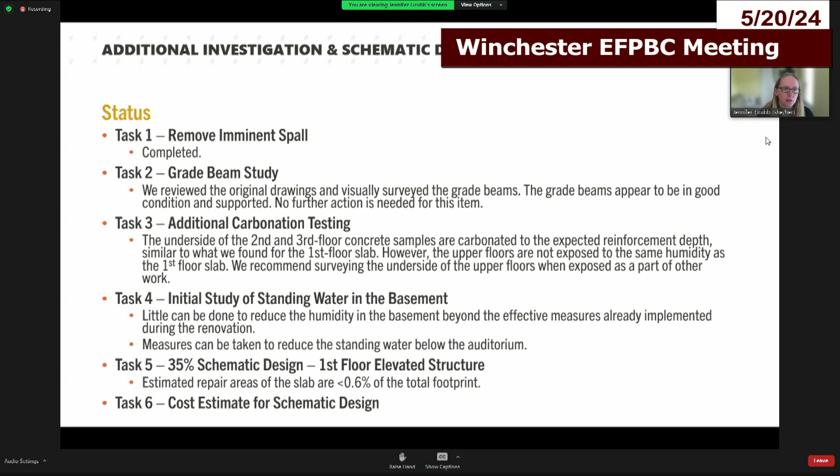Tasks 5 and 6 were coming up with a schematic design and an associated cost estimate. We estimate the cost to be a little over $1 million to implement both the concrete repairs and to apply a corrosion inhibitor to the underside of the first floor slab.

The concrete repairs are a little under 400,000, we estimate, and we estimate 630,000 for the corrosion inhibitor. The corrosion inhibitor, as you see, is the larger piece, and that's what we want to talk about because there are alternate options.

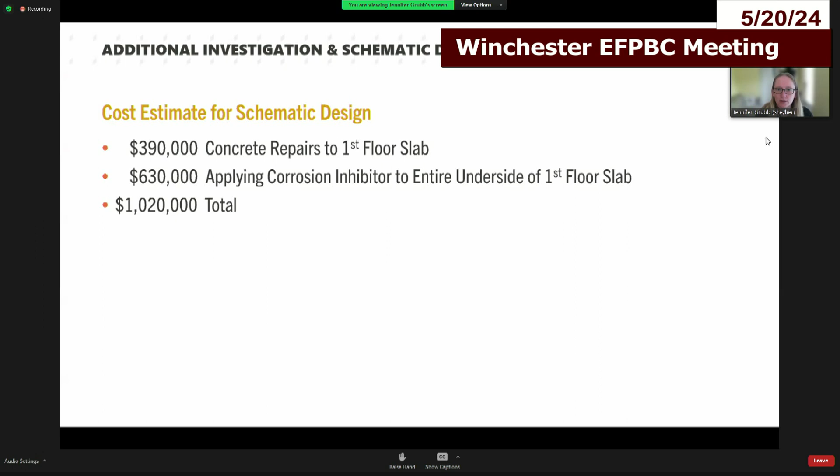Now, we are looking at the underside of the first floor slab because we saw widespread carbonation. Carbonation is when carbon dioxide reacts with the concrete, resulting in a heightened risk of corrosion of reinforcement. So there's a possibility that while it is in overall good condition now, corrosion of the reinforcement could be ongoing, and there could be widespread deterioration in the future.

We don't know the rate or the extent of the corrosion, but we could learn more over time and with further investigation.

I apologize, there was another point I wanted to make. When we talk about the risk of widespread deterioration, you want to know the likelihood of it occurring and what the repercussions are if it does occur. If this widespread deterioration does occur, it'll be costly concrete repairs that are very disruptive to the school.

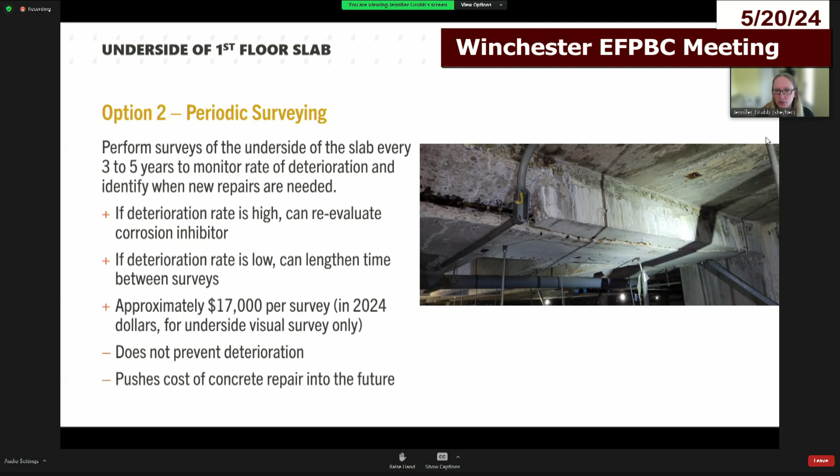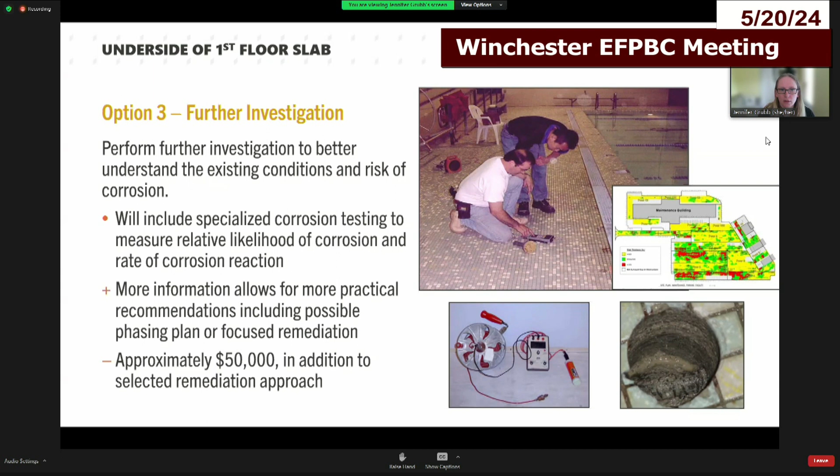We estimate it'd be approximately $50,000 in addition to the selected remediation approach. That's what I wanted to cover, and we're looking for your feedback on what approach to take for the underside of the first floor slab.

Okay, thank you. First question from Mark. Jennifer, thanks for the presentation. If you do further investigation now, it sounds like the intent is not only to identify hotspots and rate of corrosion in different places, but also if you were to implement something like the surface applied corrosion inhibitor, it's possible that it could be selectively applied just to areas that were at highest risk. Is that the idea? Yes, and so to reduce the cost of the application.

Okay, Don, next. Thank you, Jennifer, for your presentation. Would it make sense to immediately start that $50,000 study before we implement any measures, to really get our arms around things? I'm just concerned about the amount of work that's going to have to be done every year to repair what's damaged. And we need to have an understanding of that for Pete Lawson at DPW for potential repair work that needs to be done.

It's the question at hand, I think - do we do that? Or do we recommend doing that? Right.

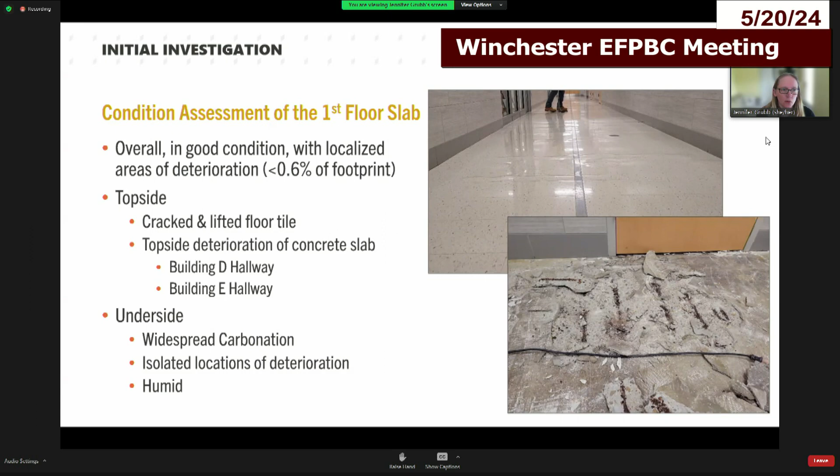There are no absolutes, right? This will slow the corrosion, but it wouldn't completely stop it. So we're just being careful not to overstate what it can do.

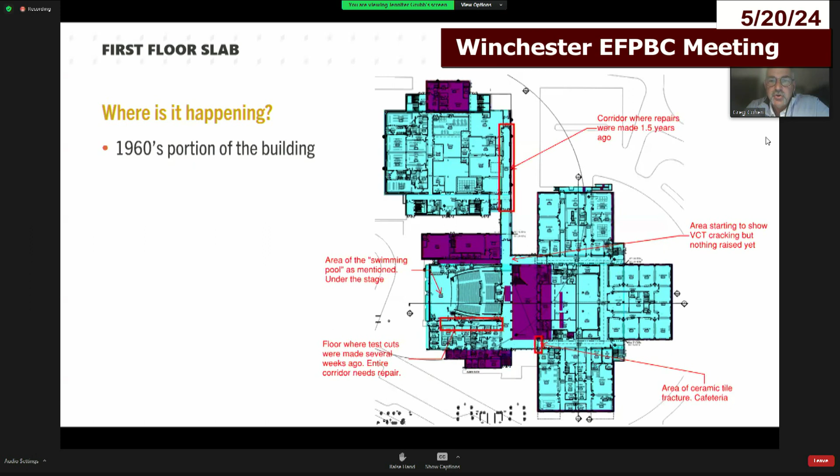So on the underside, there is another option to coat the concrete to keep the moisture out. But that's about 5 times the value of the corrosion inhibitor. So we're trying to provide the best options financially that are going to provide long-term durability to what's left behind.

So there are two different options: the corrosion inhibitor to protect the underside, and then where tile or carpet or VCT is removed and replaced, there's a repair program that will slow the rate of reinforcement corrosion on the top side locally instead of globally.

Just an admixture or something in the concrete? It's a coating. Okay, a coating, another clear corrosion inhibitor or a coating, something with some thickness to it. Yeah.

Hey, Chris? Are you all set, Mike? You're set, okay. Chris, so I guess just 3 quick thoughts with respect to the topside corrosion.

I think Jenny, you were the one who mentioned this a couple of months ago, that in the 60s and 70s, when this building was designed and built, there was much less awareness in building science about chlorides in a number of building products. It's entirely possible that even the adhesives they were using for the VCT could have introduced salts when the building was originally built back in 1960.

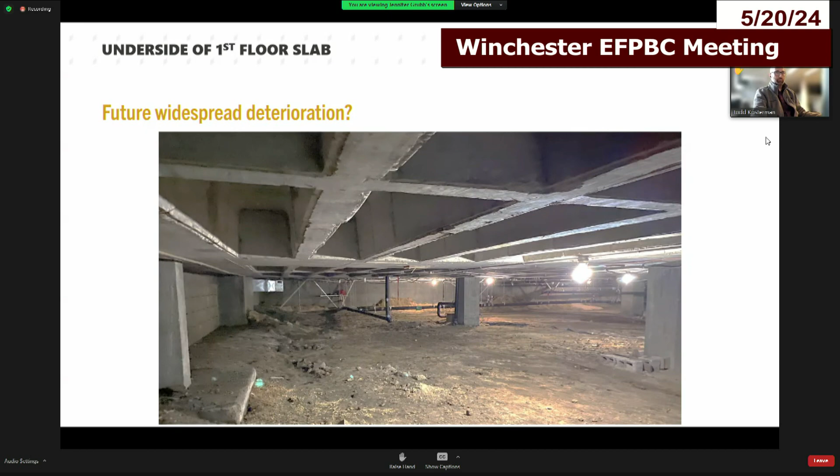Okay, Todd? So I have a couple questions. If we do option one, does that mean we do not need to do option three? And also, is humidity really the cause of the problem besides the salts? If we reduced humidity on the top side, would that help? Would that slow or stop deterioration? And is this really an HVAC deficiency? And is there anything we can do to the basement underneath to reduce humidity?

For reducing humidity in the basement, we looked into that, and there isn't much that can be done to reduce the humidity past what was already done. From the top side, we don't know what the exact source of the moisture is. It may be the small amount of moisture that comes from when they clean the floor. I know from what Chris has described that when they clean the floor, there's no standing water — it's put down and removed in the same process. But that's our best guess as to where the moisture for the top side is coming from.

And could you repeat your first question, please? If we do option one, is option three not necessary? Yeah, no, option three is not necessary, doing the detailed investigation. We proposed option three as potentially instead of the more costly option one.

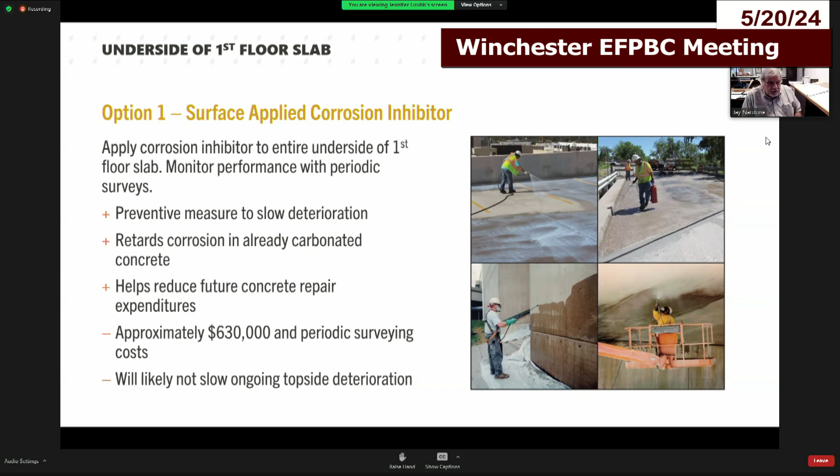Thank you. Jenny, can you pull up your slide that has all 3 options on it, just so everybody can see it? Thank you. Hey, Mark.

Jenny and Greg, just to follow up on Todd's question earlier about whether this is potentially an MEP question or a humidity management question: would it have been possible to lay down a vapor retarder on the rat slab or the dirt of the crawl space, tape it tight, and then use ventilation above to eliminate or vastly reduce the humidity, and therefore reduce the amount getting to that carbonated concrete? Is that feasible? And two, is it cost effective compared to just applying the corrosion inhibitor?

Greg? Yeah, I think we did talk about it. If you were to cover the soil, you'd need to add gravel to the top of it because it's a working surface down there. We'd need to get rid of some of the locations with ponded water. We did talk about that, and we think it's groundwater, so there's no way to change the groundwater table. And the cost would probably be comparable, though we didn't estimate it. I'm just spitballing here about the cost to do that. It's probably comparable to the corrosion inhibitor.

We looked at a range of different samples and ultimately settled on a sample that should be fairly consistent with what we've been looking at in renderings. I would call it a dark champagne color, sort of a warm gray, which has some cute name like bright stone gray or something. But that definitely felt like the best of the materials, because it matched very well in terms of its warmth with the brick, with the Arriscraft, which is the whitish brick you see on the right, and the Trespa, which is the wood-look panels.

So my understanding is that Tappé has given that direction to Braid, and they have gone to procure the materials for the windows specifically, but I believe also for any other little bits of metal that might be on the mock-up. Yes, they have confirmed that they did that. So we're good on that.

Thank you. The pieces that aren't determined yet, but I believe we're going to get yet another preliminary set of mock-ups just on boards, will be for the mortar color for both the Arriscraft and for the brick. That decision has not been made. Tappé had some thoughts about a few that they thought might look good. Braid is going to mock up probably 3 to 5 different mortar colors on a big panel of brick, and then we can all come out and take a look at that when it has been prepared, and that will all be in advance of the full build out on the visual mock-up, which will be of the preferred recommended color.

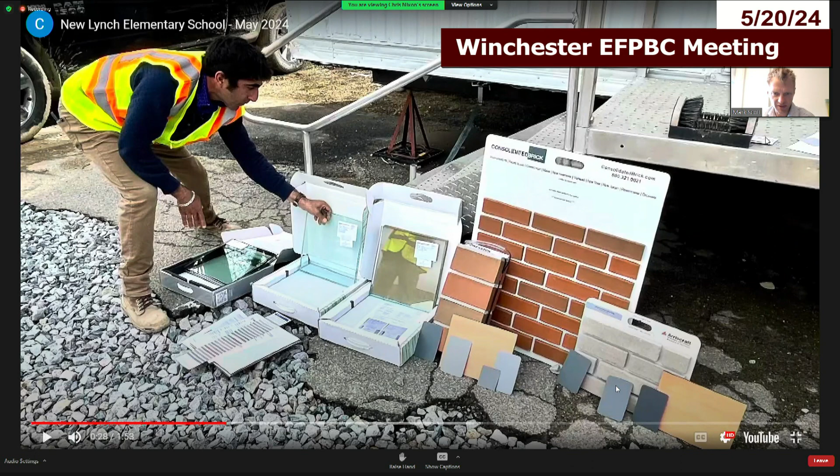The preferred gray is - I think, well, it's hard to tell in this photograph. Chris, I think this was one of the ones you set up, right? Yeah, this was the day before. Yep, our mock-up was a little different. Okay, the day after.

All the materials are on site, so if anyone wants to see what we should expect, Mark Krikorian has them in the trailer on site, along with glass samples and a mortar color palette. If you're interested, you can go visit. They're very friendly, they don't bite.

I would just add that the color that was ultimately chosen, you really have to look at it carefully in different lighting conditions. I played a trick on the superintendent because I took a picture against the brick at one angle, then just changed the angle by 5 degrees and got a different color, changed it again and got a different color. It's really unique to that particular sample, that small piece.

The video I was showing you is actually up on the Lynch Project website that just went up yesterday, showing May progress. There was a small 3-inch by 3-inch square chip that Brait was kind of hopeful we'd pick, because that's a standard color. But it really was dark, with a lot of blue in it.